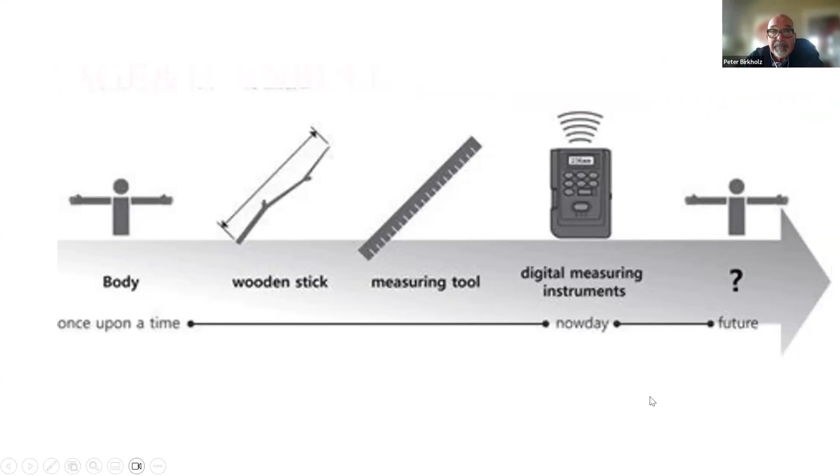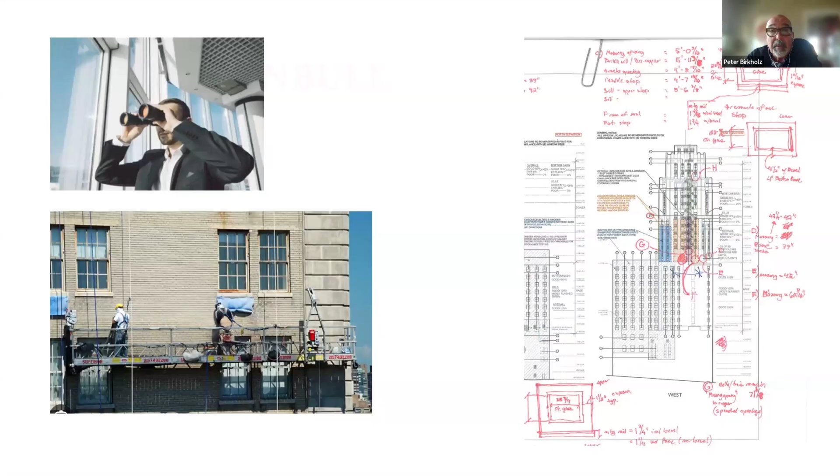Again, how do we do our work? We go out, when we're not doing the laser scan to BIM, we use binoculars, we get on swing stages, we measure things. We take old drawings, we mark those drawings up, like you see on the right. We take that back to the office, or we send it to a consultant, and then the typical process was manually putting that into CAD or Revit or something like that, and getting some sort of a line drawing that can be used for the documentation going forward. Incredibly laborious, and prone to inaccuracies.

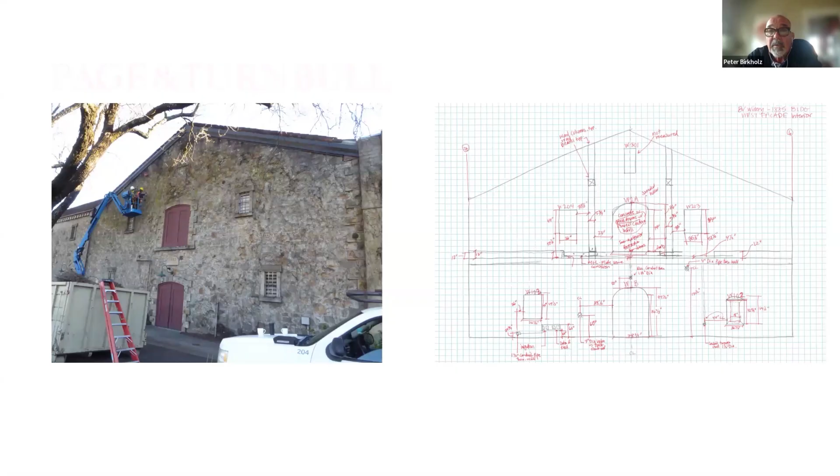More examples. This is a building up in Napa that we're working on currently, and this is a field drawing where somebody's gone out there and measured things and gone back into the office. So where we can, we do incorporate laser scanning in.

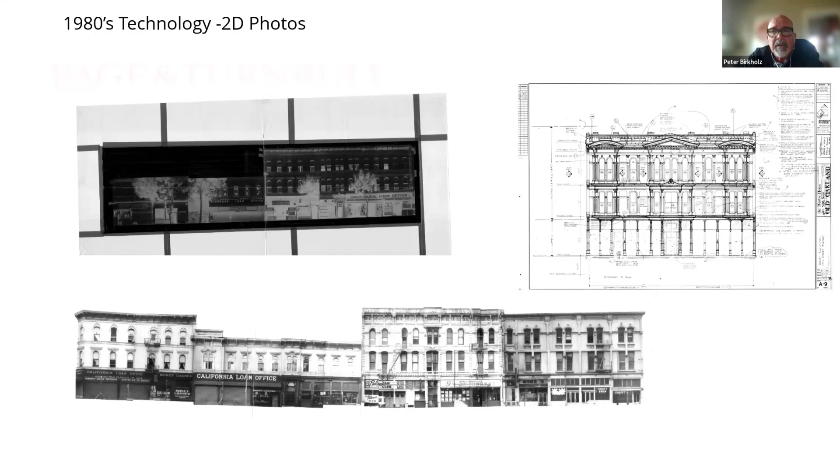Again, looking back to where we used to be, this is something I found in our archives where in the 80s, this is a building in the oldest buildings in Oakland, the commercial buildings, and the process then was to go out and take orthogonal photographs, take those negatives, tape them together, send them out to the blueprint place. They put them onto Mylar, and then that became the basis for drawings that you see on the right with lots of hand notes. So in a very short time from the 80s until now, where we've gone from hand drawing to CAD to now Revit, things have changed a lot.

I do want to mention that it's kind of ironic that one of the things in the heritage work that we do is the Historic American Building Survey. And the Historic American Building Survey has been around since the 1930s, recording prominent landmarks in the US. And they rely, and they still request, that these kind of line drawings, which are interpretations of the buildings, not incredibly accurate, but somewhat of a facsimile of the building, is the method of recording that. And so somebody is paid to do this sort of documentation, and then these drawings are printed archivally and they're put into repositories.

A lot of the work we do in California has to go through the environmental laws, and we call it CEQA, California Environmental Quality Act. And often buildings that are being demolished or altered, we have to record those as a mitigation for CEQA. And again, typically the status quo has been to just document these in paper drawings. We are now seeing things moving towards laser scanning and Matterport scanning, which I'll talk about, and putting those into some kind of archival form.

And there's also Historic American Building Survey photography as well. But the idea is that all goes into a repository that's sort of archived forever. But we are seeing a little bit of change where these sort of newer technologies are able to be used. And I would say that the drawback on the newer technologies, though, is you have a large digital model, and how does the public access it? And how in the future is the format of that digital model going to be a program that people have available to them?

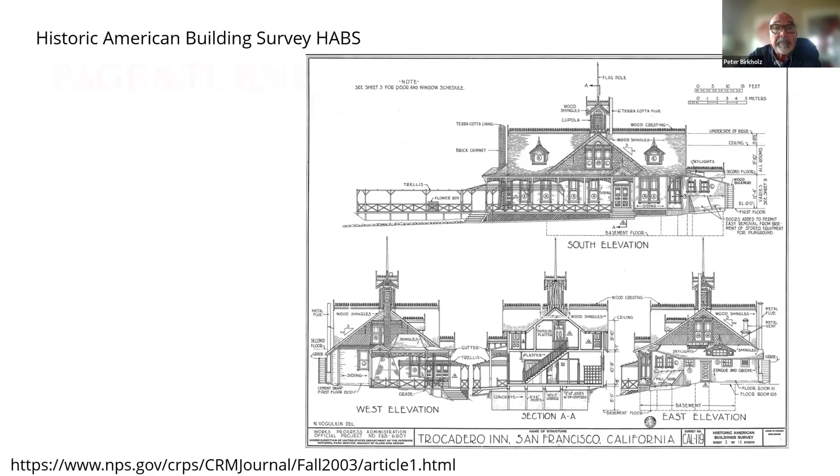Yeah. And the reason we had Ryan scan this was that we wanted to be able to push technology in producing models and facsimiles of this. And we were able to take that scan, Ryan, and I quite frankly can't remember the process of taking that scan and converting it to a file that ultimately got us to that STL file where we could print a small model of that. And I'll show you, I have one sitting here to the side, but I'm not going to go grab it.

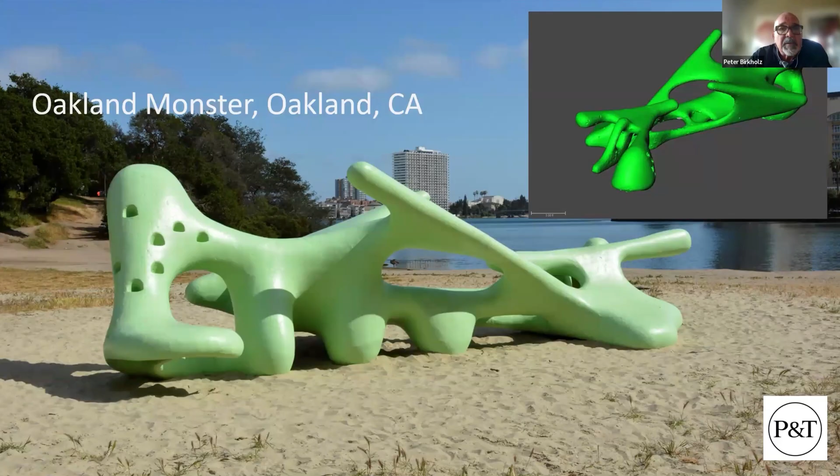The larger scale of projects that we're doing: Page and Turnbull is on the team for the California State Capitol Annex, a $500 million project in Sacramento. This project started about 4 years ago, and we've relied heavily on laser scan to BIM. I'm sorry, Ryan, but Trimble got this one.

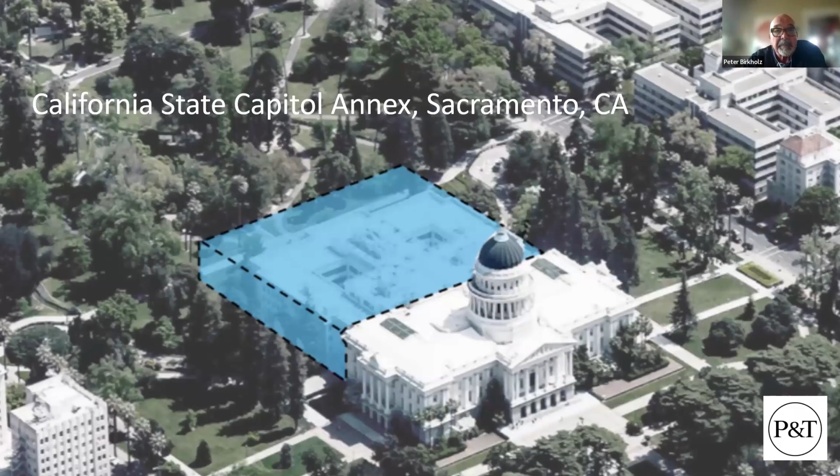I mentioned a Matterport scan. A Matterport scan is often another deliverable. The beauty of a Matterport scan, say on the Desert View Watchtower, is that point clouds are hard to manipulate and look at, but the Matterport scan gives a readily available virtual room-by-room twin that we can walk through and look at existing conditions.

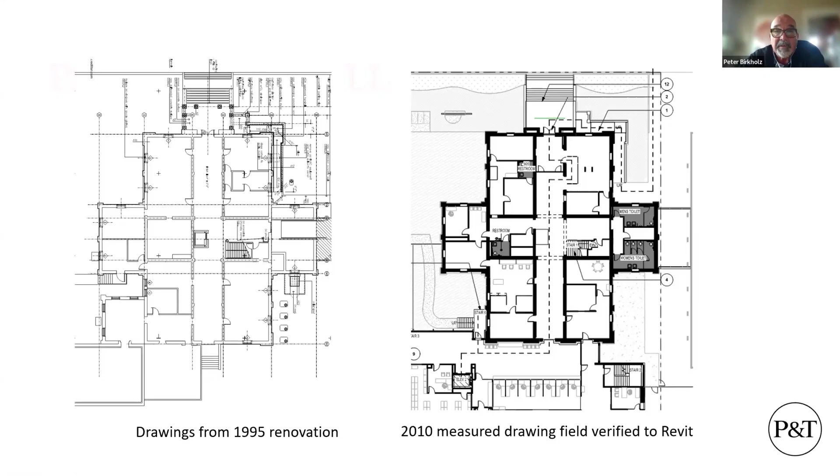So you miss things when you're going out and measuring, where yes, you've got a door, but where exactly is that door on the plan? It became a CA, a construction administration problem, coordinating how big that door is and where that door is. But since 2010, we have been exclusively going to the scan to BIM process.

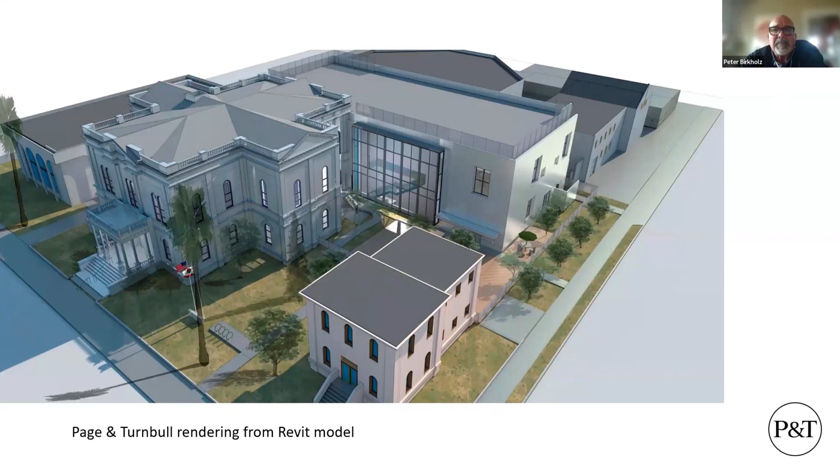One of the other beauties of scan to BIM is you get a lot of detail. This is a rendering that we produced in-house from our Revit model, and you can see it's a little flat, not a lot of detail. You get a much more detailed product when you go scan to BIM.

Another project we did, and this was an interesting one in that, did you do this one too, Ryan? Yeah. Yeah, I sure did. This was a little bit of a rabbit warren, lots of levels, yeah. And deceptive. So a 1920s, two hotels next to each other. And the issue with these two hotels next to each other, you see on the left this bigger block, and then on the right, you see this smaller block.

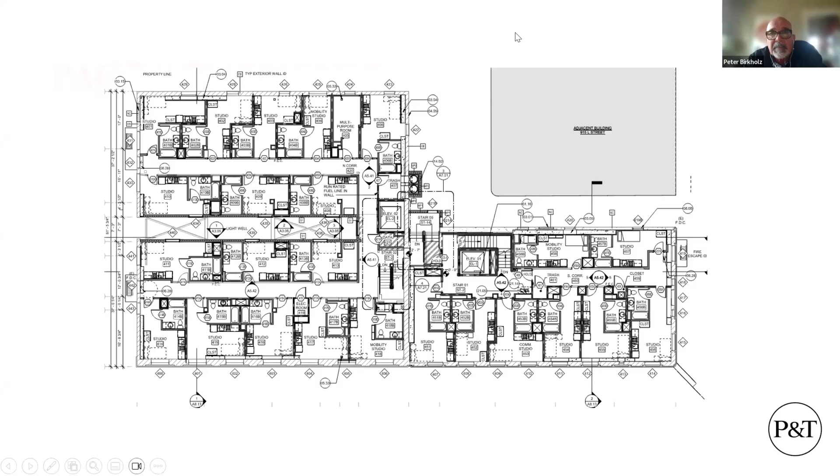And in the section here, you can see I put a section line across here through the center, but the floors don't line up. Each one is about 18 inches. The floor to floor height's 18 inches different. And the issue became, I believe, Ryan, that we didn't scan it as one model. We scanned it as two or vice versa.

And so when we went to do our Revit model and we were putting the floor plane in, in some cases it would have part of the sixth floor and part of the fifth floor on the right, or vice versa. And to even complicate things further, we were working with a drafting firm in India that was helping us with the drafting because it was in COVID and we were incredibly understaffed.

They started masking floor areas to sort of make the plan work so that everything was on the fifth floor that should be on the fifth floor. We didn't know it, and it just became major confusion. In the future, always scan these things as one model, I think was the lesson learned.

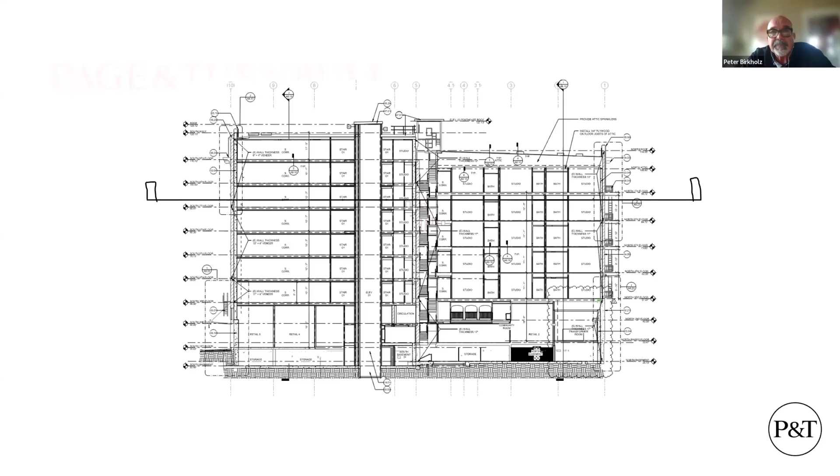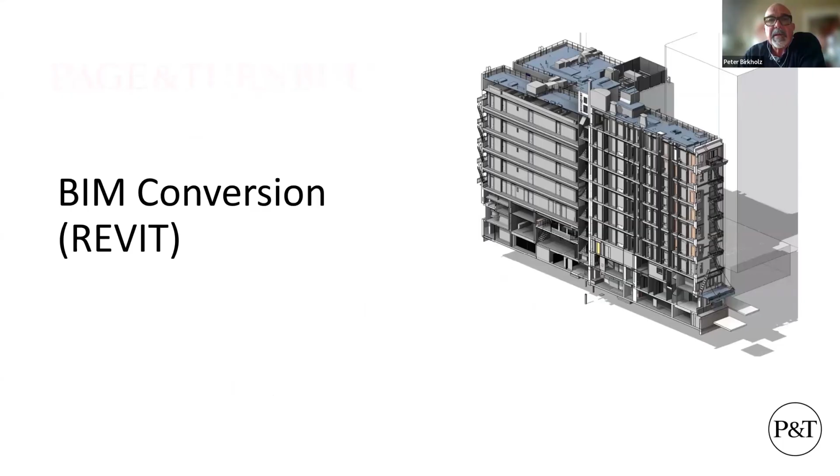Ryan, I'm going to let you talk about photogrammetry and laser scans perhaps in more detail. And unfortunately, Ryan, due to the timing, I couldn't get a lot of pictures into your slides, but I'm hoping you can fill in words. We're going to talk about BIM conversion to Revit. I'm actually really curious, Ryan, how the heck does that happen? Is it automated or is somebody really tying all those points together? We'll talk about how much detail.

I think the benefits are you get accurate dimensions on your computer, you've got the virtual twin on your computer. You don't have to go back to the site. Like if we're going up to the Grand Canyon or something from San Francisco, we've got that picture and the point cloud, so we know what it is. We don't have to go back for additional visits unless something happens to the technology and we have to redo it. It allows for QA such as clash detection, and you get a lot of precise details.

And I think one of the interesting things on historic buildings is that it's important that it captures out of level and out of plane. For instance, buildings over time have settled, and we've got a tenant coming in that wants level floors, but we don't even know they have unlevel floors when we're doing it with the tape because it's very subtle. The laser scan will capture all that.

And if we're doing a new addition and the walls of the building are slightly out of plane and we've got a new curtain wall going, we can accommodate that out of plane differential with some sort of a joint that is, say, bigger at the bottom and smaller at the top.

Lessons learned: you want to do it early, you want to scan everything, scan behind. And I think another issue we had, Ryan, on that St. Clair or the Capitol Park Hotel was, that was a single room occupancy, which, for those of you who don't know, is a hotel for transient people and the lowest cost housing that's available. In COVID, there was a huge demand.

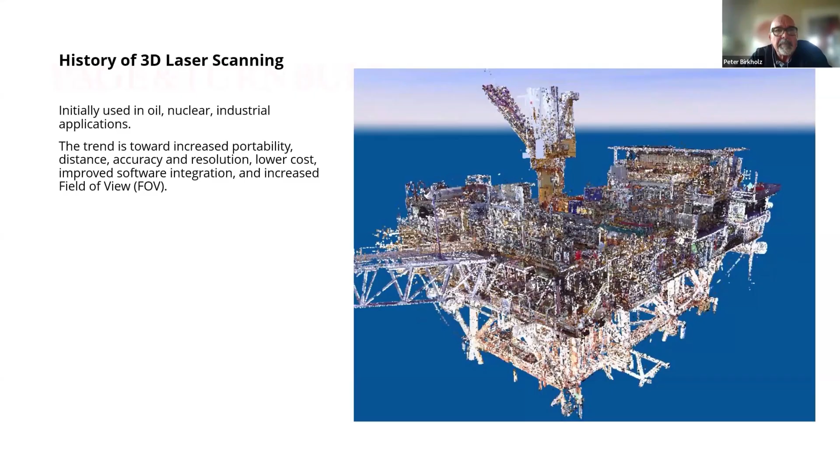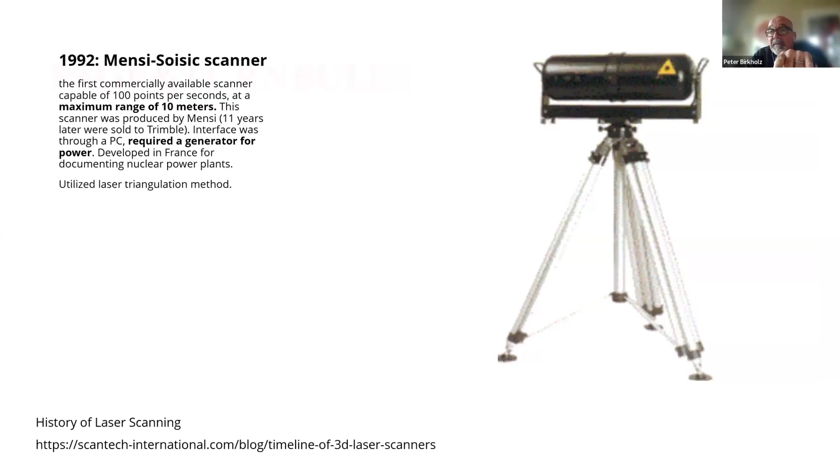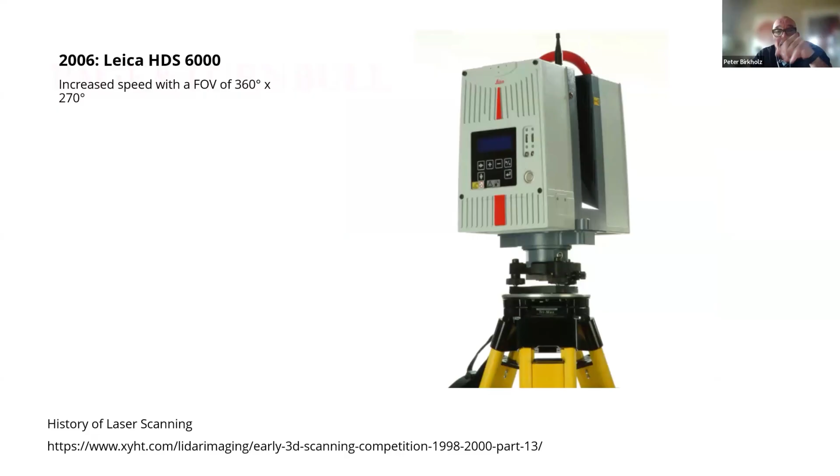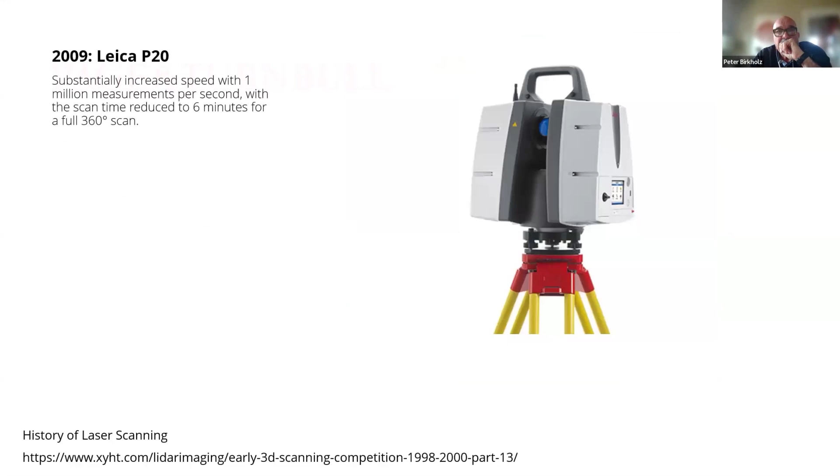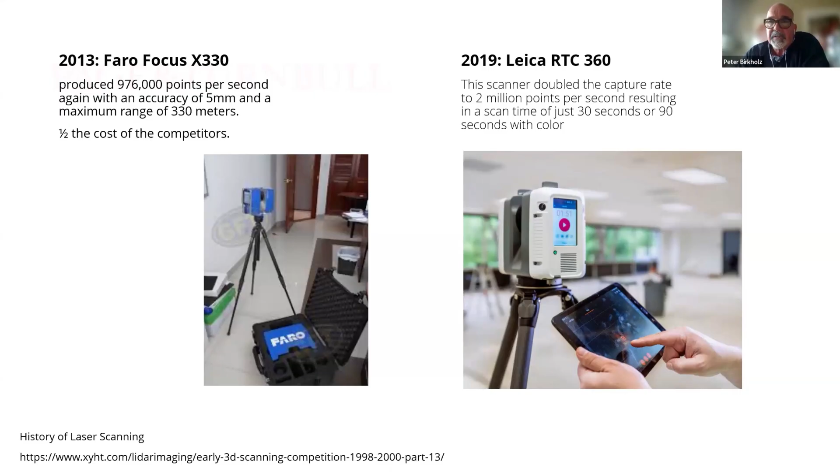And I'm not going to get into this, but Ryan, I would like to hear from you when we get into this. What was your first device and how much it cost? Because I think the early devices were hundreds of thousands of dollars, and now they're significantly less than that. And all this happened in 20 years. I think it's just amazing what's happened in 20 years. And now, Ryan, I'm going to let you sort of talk about where you've come from and what you've been doing.

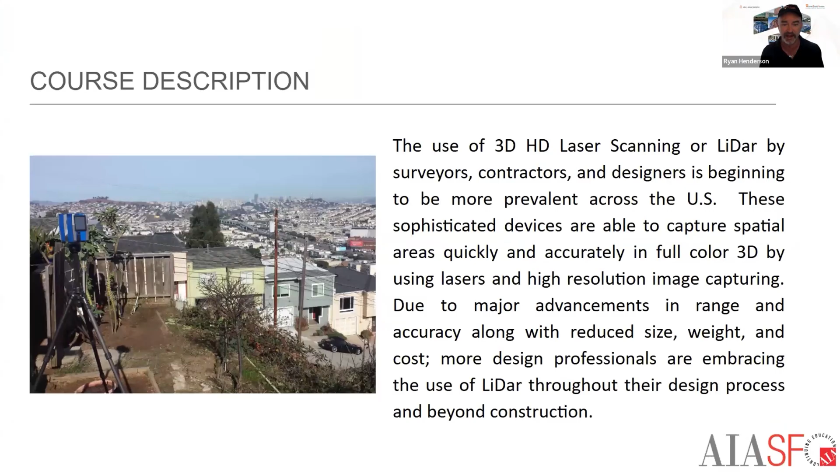Sure. All right. Thank you so much. If it's possible, I can share some slides. I can just kind of blast through a couple of things from a presentation that I've got pulled up, if that's okay. I will stop sharing. How's that? I can see it. Okay, beautiful. This is a presentation that we give that's usually about an hour long, so if it's okay, I'm gonna whip through this pretty quick. Peter's covered a whole lot of things already, and I'll just pick up. I'm gonna talk over these slides, and people can read just so they're on the recording.

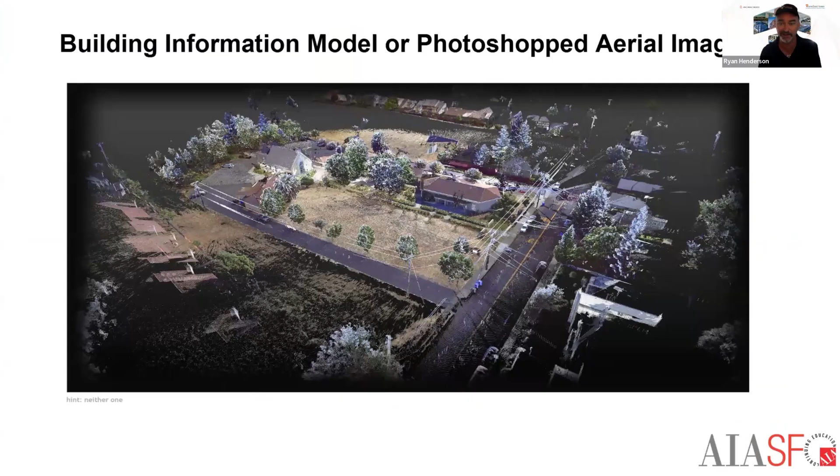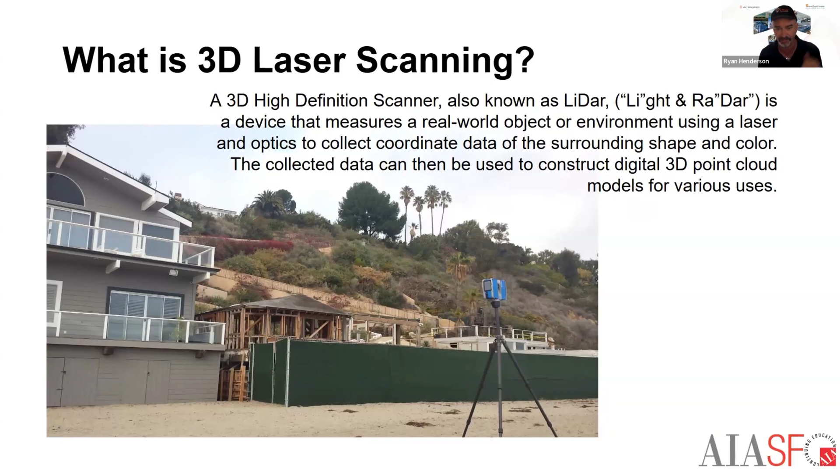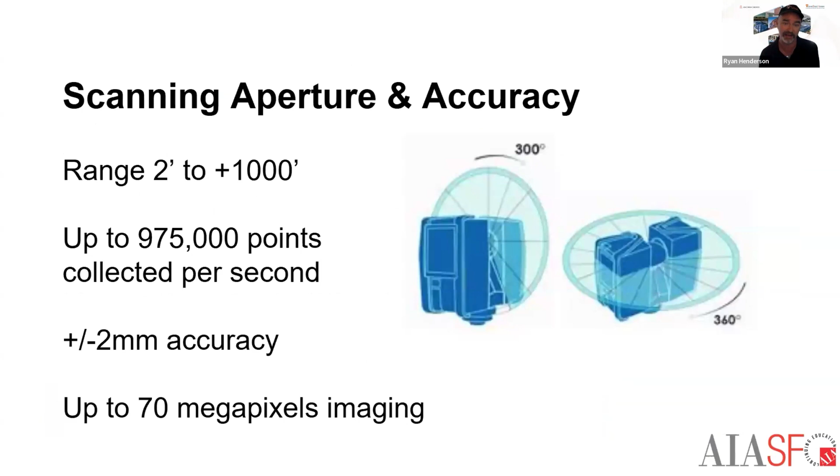So Peter, very detailed. Thanks for that. Kind of brought me back to the early days. We did actually start with a Faro 330. You can actually see it right here. And what was the price of that, Ryan? Out the door, the figure we all throw around is basically 100 grand. Yeah. I was lucky enough that I had a bit of a real estate investment windfall, and I knew this is where everything was going. And I had just decided to launch out on my own, and I needed to set us apart from other firms. And this did it.

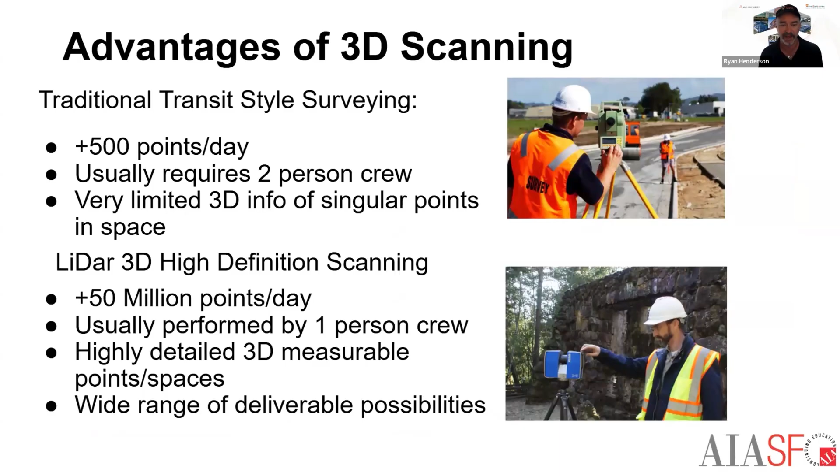Unfortunately, in some ways, it did it in terms of providing scan to BIM services, which trumps our architecture services by a fair clip, which is totally fine. However we can provide service to move forward design and building technology, I'm all for it. We had actually worked with SCI-Arc in the early days, doing some historic recordation here in Sonoma County, where we're based. Here's a great slide of sort of what we used to work with versus what we work with now.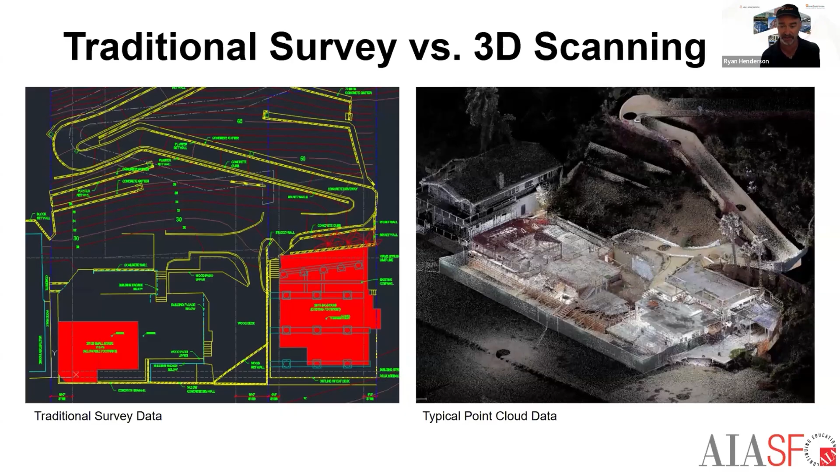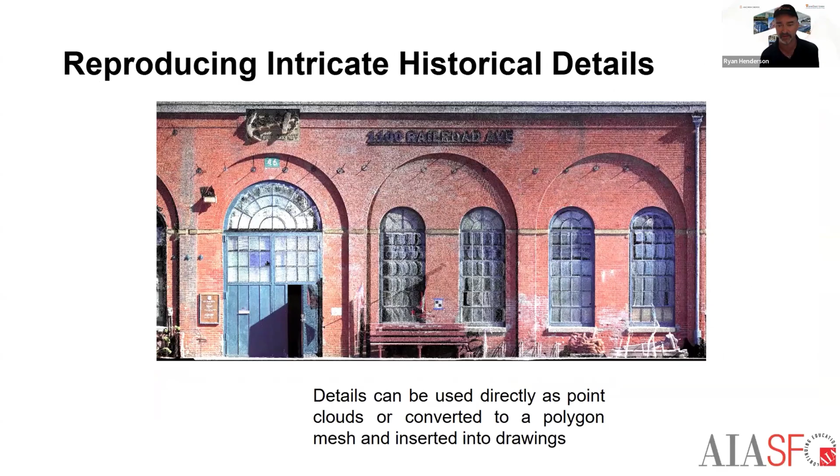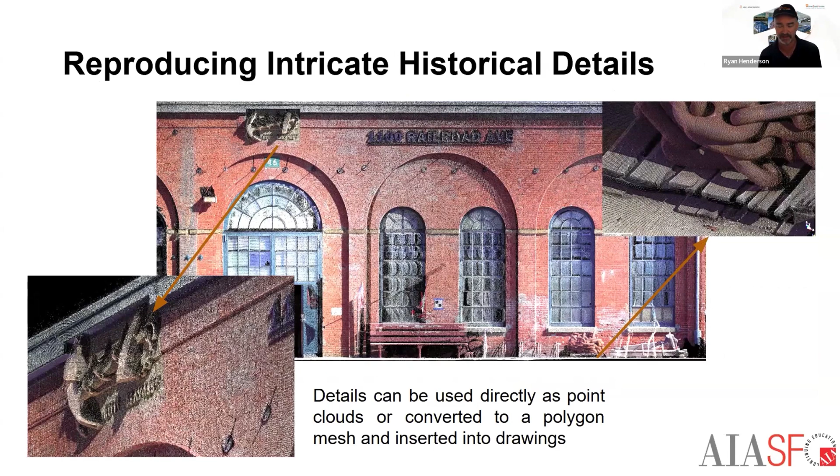So this was a project in Malibu on the beach, and on the left is sort of standard, very low information civil survey, and then on the right was our laser scan, which has literally every stud, every screw. Sometimes that can be too much, and so one of the skills for scan to BIM providers is to just get down to the details that actually matter to the project. The scanner doesn't care if you're capturing an ornamental detail on a building or the gaps in the wood on a pallet rack. It does not care. It will measure it if it can see it.

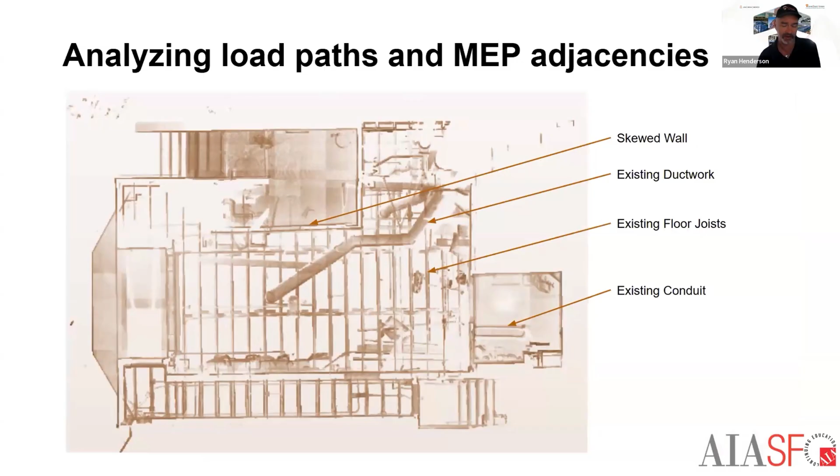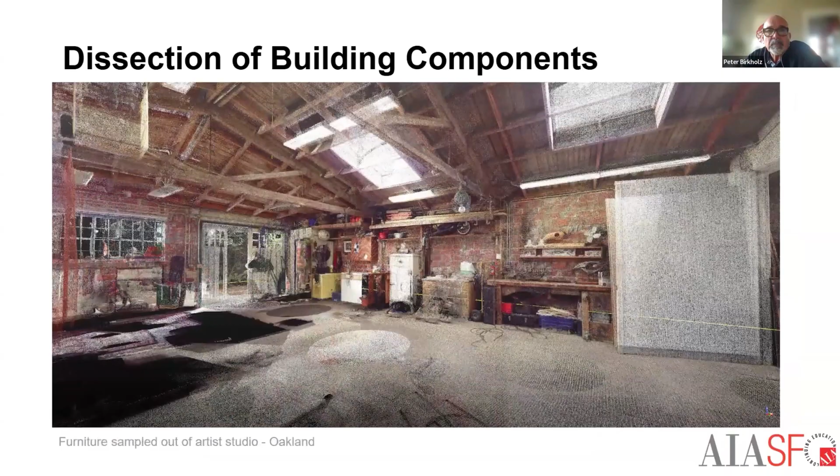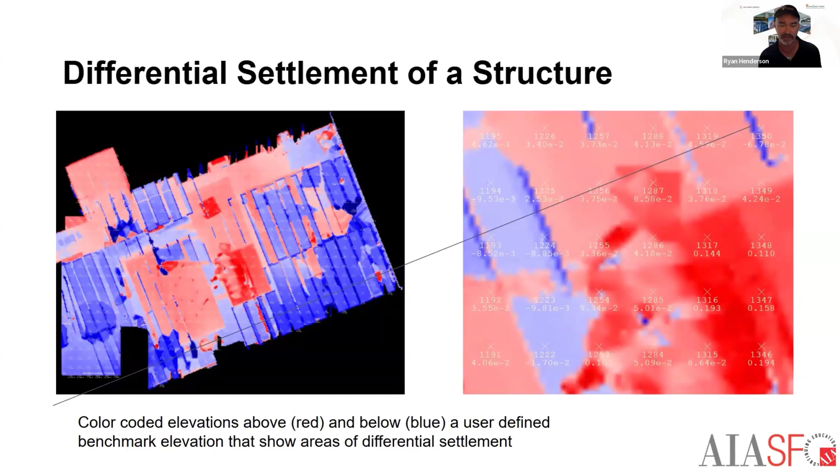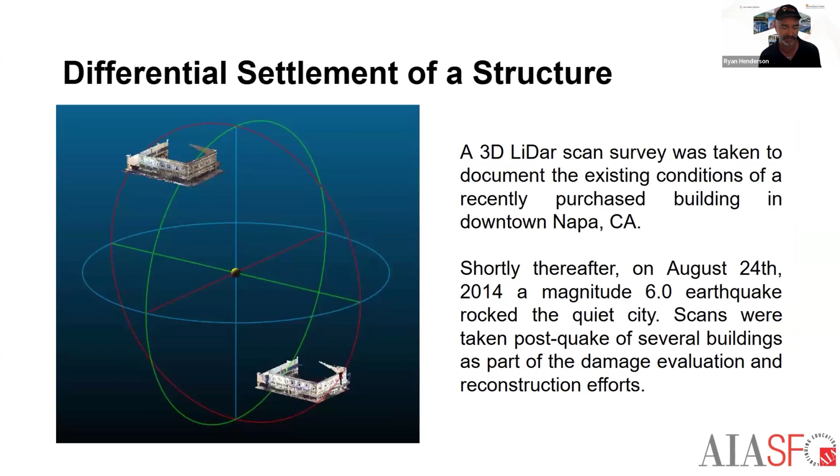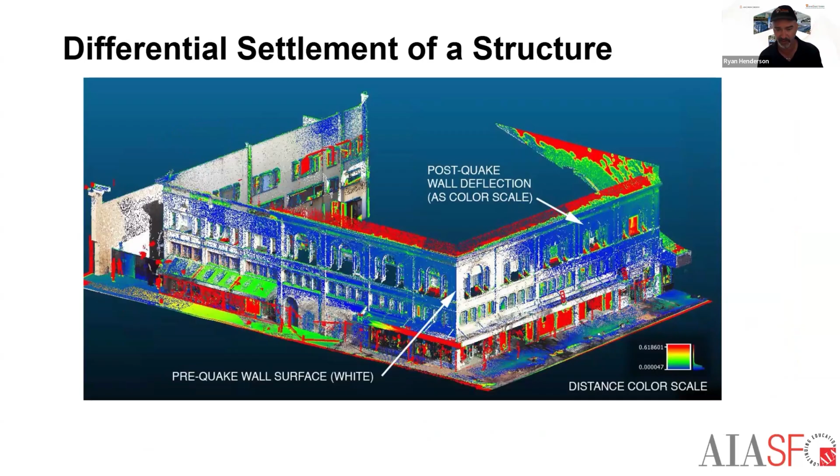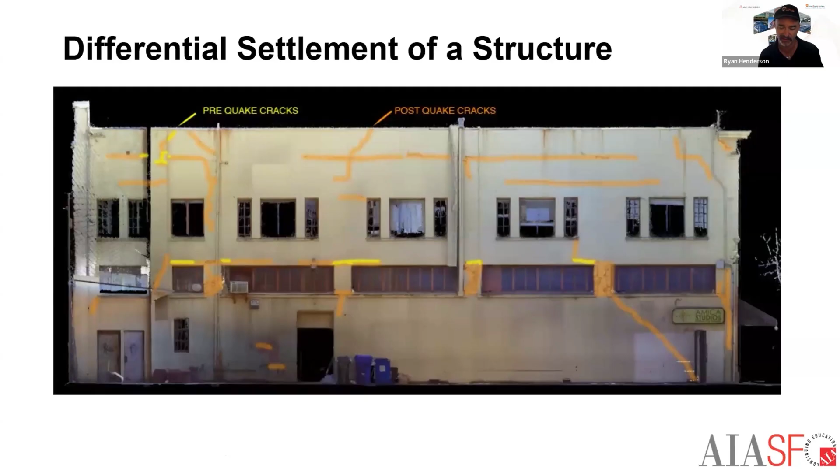This was an example of some floor flatness scenarios that Peter was talking about earlier. We've encountered those for medical office buildings where everything needs to be very flat. Older buildings in San Francisco have lots of differential variations in floors due to the technology not being the best in terms of forming and pouring and helicoptering slabs and things like that. So this is a quick example of pre and post earthquake, where we analyzed the building and it actually torsioned about a whole inch. And we could also identify individual cracks before and after using orthogonal photogrammetry from the laser scans.

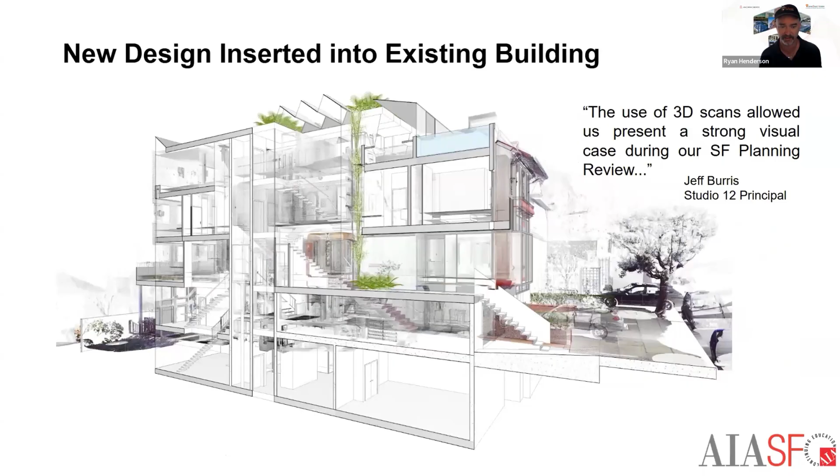One nice thing is being able to overlay new designs onto old designs. This was a project where the neighbor was complaining to the planning department saying that they're making the building bigger, it's going to block her views, and they showed those images and said no, it's actually still within the same envelope.

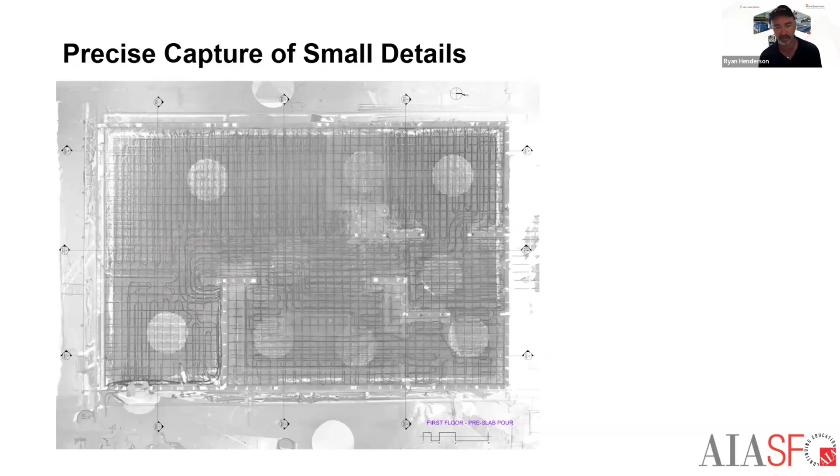This was some of the things that laser scanning people think they can do is like X-ray, like see through things, when that's actually not the case. However, if you scan at certain points of time during a project, you actually can effectively see through buildings. In this case, this is a pre-slab pour of underground or in-slab heating elements. And so we wanted to make sure that we knew exactly where all of these tubes were and also where the rebar was. So when they were doing embeds or posts or handrails into the slab, they would not hit pipes that were in there.

Blast through some of these. This was an example of some above ceiling scanning. Peter mentioned that as well. When possible, it's a good idea.

Ryan, you got plenty of time, so okay, good.

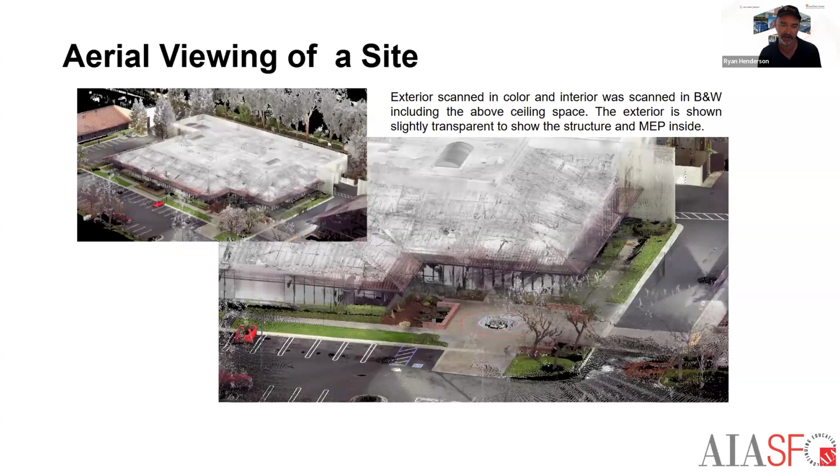It's a good thing to do. Unfortunately, it is somewhat cost prohibitive because it's a ladder operation. It's having somebody remove ceiling tiles and put them back in some cases. Ideally, what we found does work is if we scan below ceiling, maybe take a couple of scans above ceiling just to get the structure above confirmed. And then if it's possible to do a design build package for MEP after a demo phase has happened, that we found works pretty well, and it keeps our costs down, because above ceiling scanning basically doubles everything for sure.

There's a couple of different products that we use, and this is from Faro and provides remote viewing, sort of a la Google Street View, but of your project the day it was scanned, and you can scan everywhere our scanner is set and take dimensions remotely, which has been, I know, a big help for us and other firms where it cuts down on the number of site visits, the number of interruptions made. And for us on the modeling side and on the design side, having the project up on one screen where you can move around and take measurements from it and notations and screenshots is highly valuable.

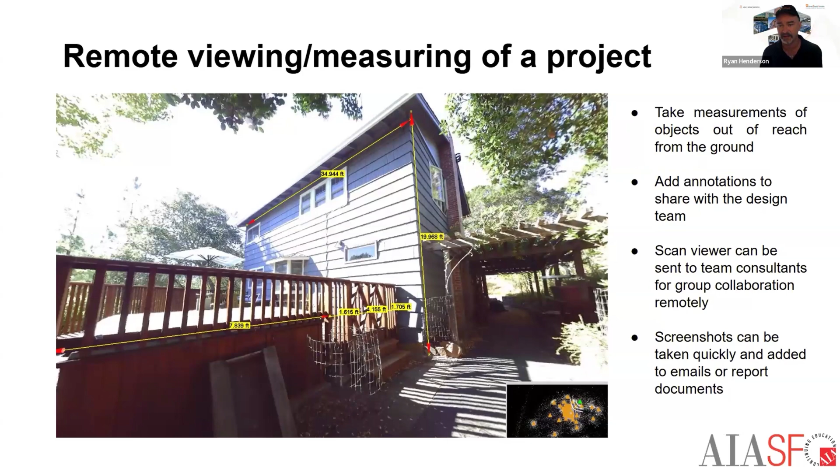And is that a point cloud, Ryan, that you're measuring? It's technically not. It's the panorama image is what you're looking at, but basically the point cloud data is stacked behind it. And so you can take measurements of the point cloud, but you're not actually dealing with the visual weight or the navigational weight of that point cloud like you are in Recap, which is an Autodesk product that integrates with Revit. That can be a little cumbersome. And so this is a Trimble product, which is a little more lightweight.

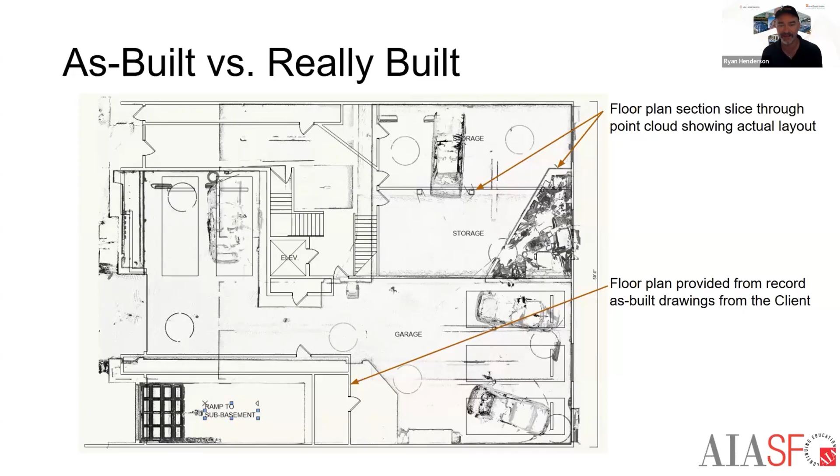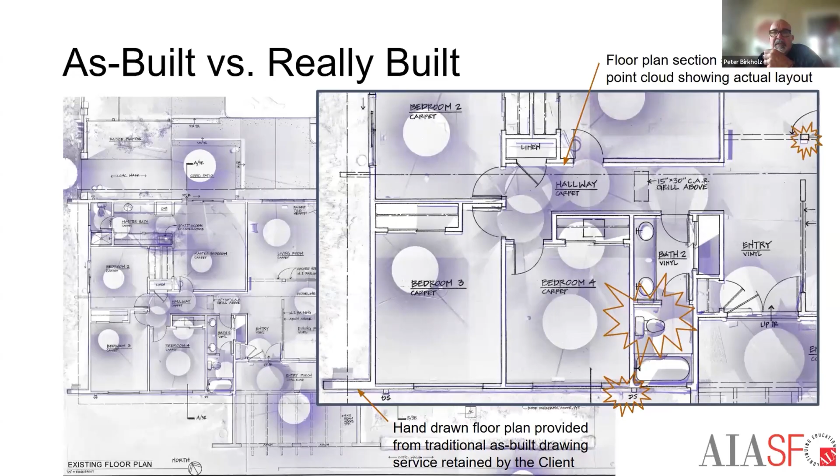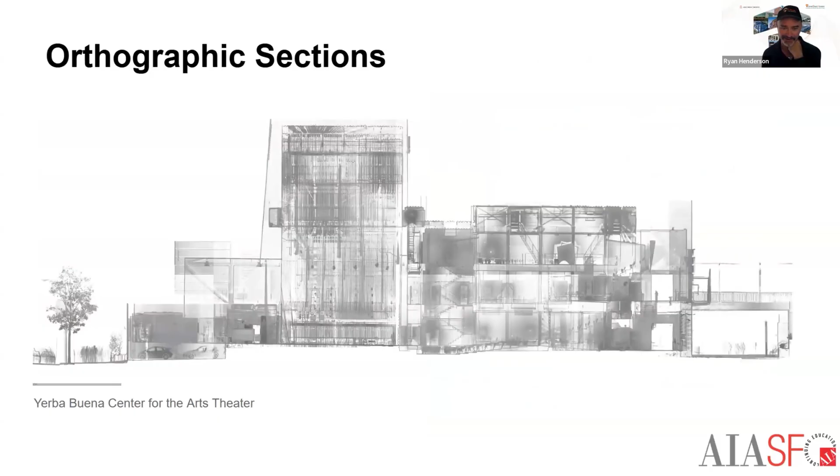Yeah, and in that particular instance, what we perceive is we think we do have an accurate thing, and we look at that CAD drawing and we go out there and it's like, yeah, it's captured it, but the reality is it doesn't. That is true. And it's hard to field measure a building like this and get every angle of every seismic brace and every rope pulley for a full proscenium, fly and stage and all those things. Here's a brief example.

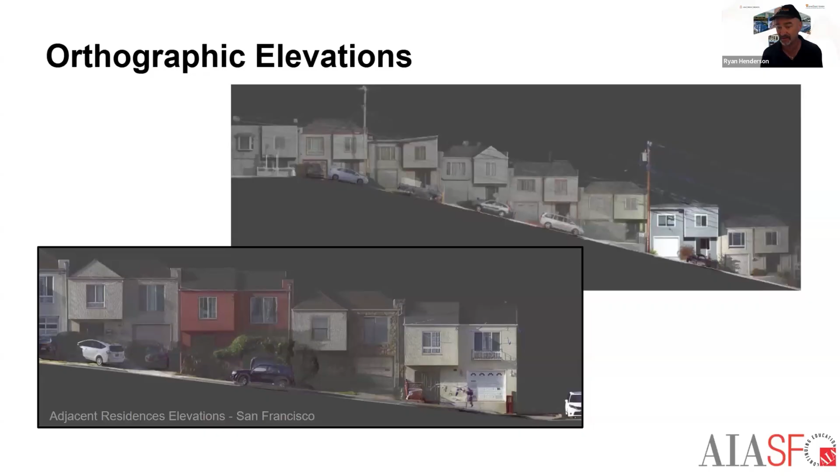And a client would just lose their mind. It's like, well, I'm not paying for that. And so we actually were able to just pull it from the scan data that we were doing from the project anyways, and presented it in this format, which was acceptable.

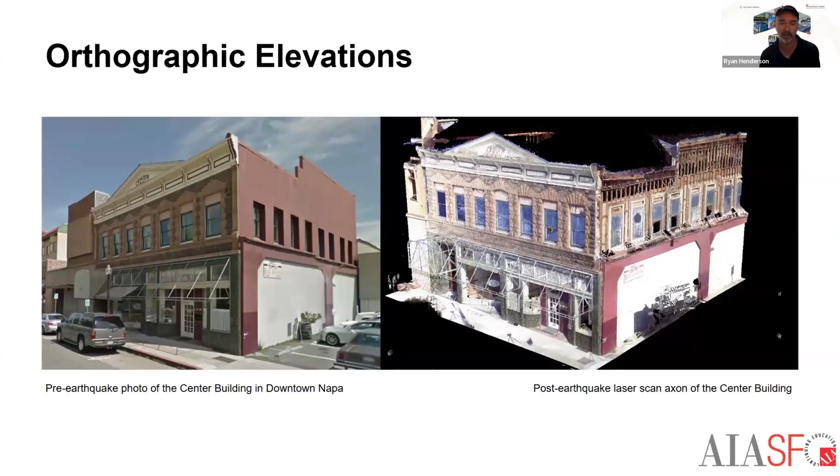Hopefully more reviewing agencies will start embracing point clouds as a deliverable, or at least the images from them as deliverables, because sometimes they're only used to vector drawings. They're only used for that, which is great. But I think the one on the left and the one on the right combined provides the most amount of information on a building, for sure.

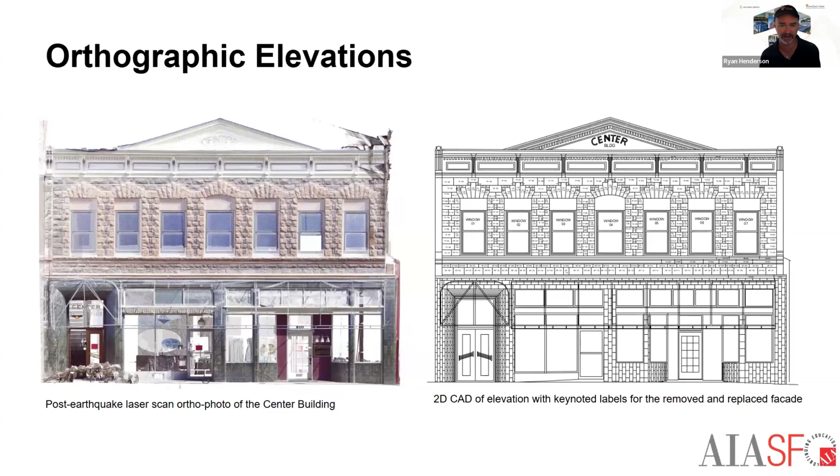So this was a case where it was post-earthquake and they had to remove every stone of the building and put it back in its original location. And so we scanned it and numbered it and turned it around in, I think, just like 48 hours. Very quick timeline. Wow.

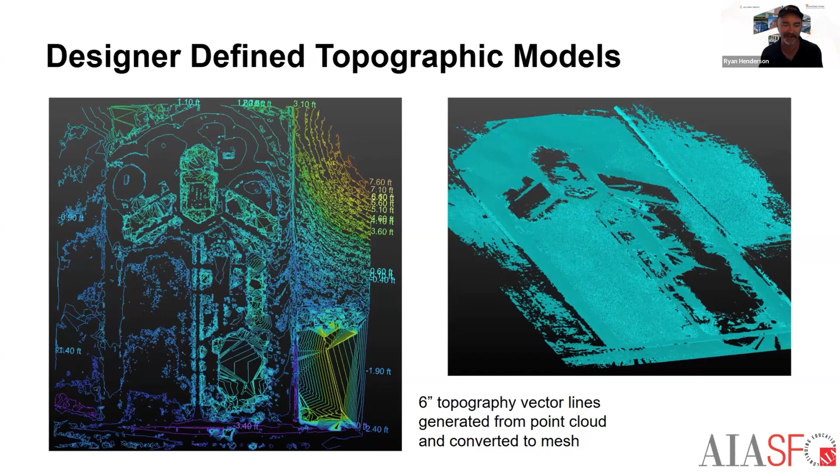But on the left, you'll see all these little tiny dots in some of the larger areas. And that is not the ground. Those are weeds, because they hadn't mowed the lawn, and they came through in the topography. So sometimes you have to really scrub your data to get good data. When we're working, we see this first before we can go in and clean everything out and give the end user what they need.

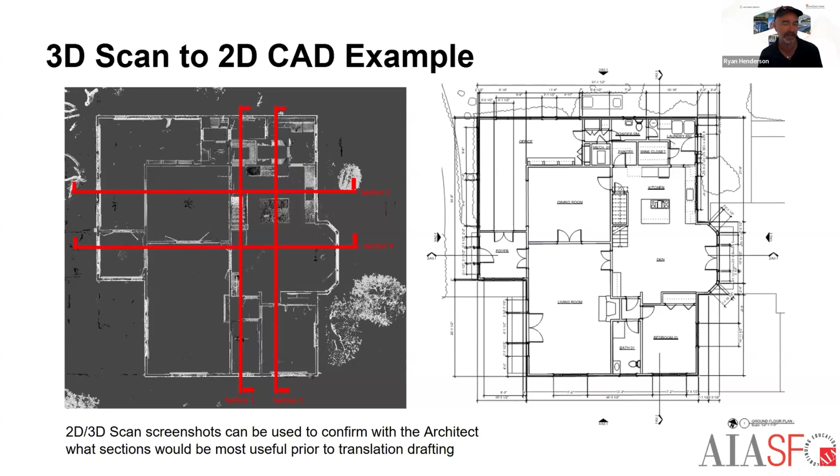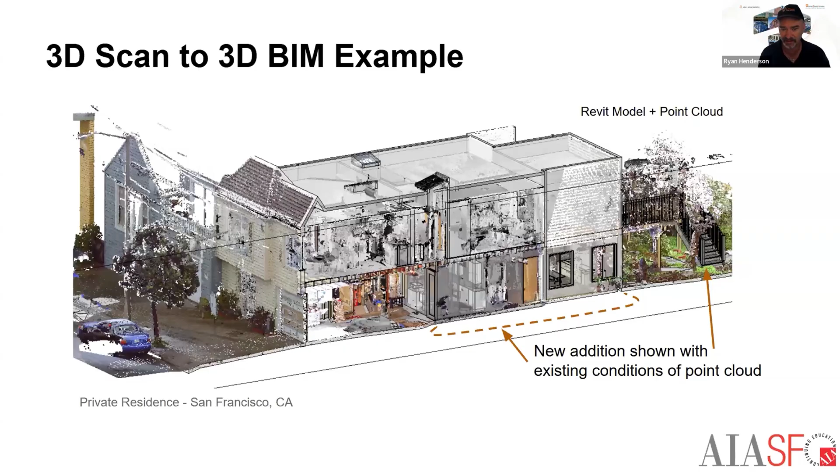We design 3-dimensional buildings, and yes, it can be done in 2-dimensional representations, but those can cause some issues. And so 95% of our clientele is Revit based, and we utilize Scan to BIM stuff all the time, obviously.

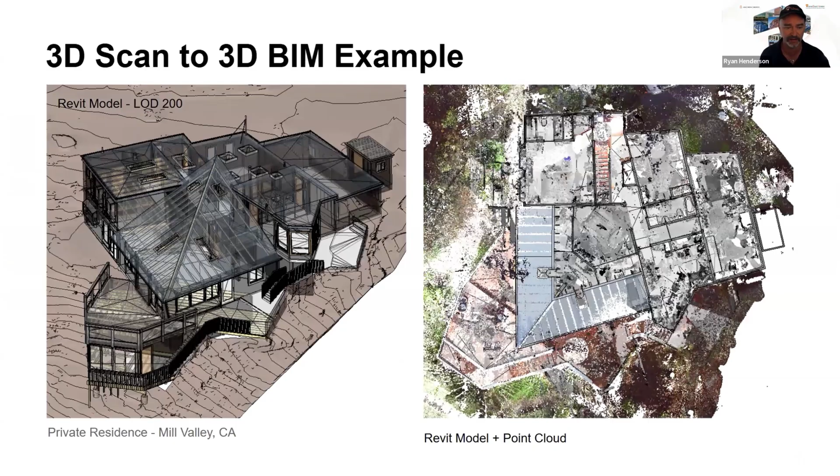Here's an example of some residences that are again quite difficult to capture in a 2D format, but we were able to get down to all the framing members and all that stuff.

I can talk about it now, thank God. We've worked with some pretty high-tech companies over the past decade and a half or so. One of which is NVIDIA, and we've worked with them on a handful of fairly large projects. And that was our first foray into mixed reality, porting point clouds to VR headsets, so you can do fly-throughs from 3D scans and things like that. That is somewhat where I think things are headed, but we'll see. VR is kind of already getting surpassed, if you will.

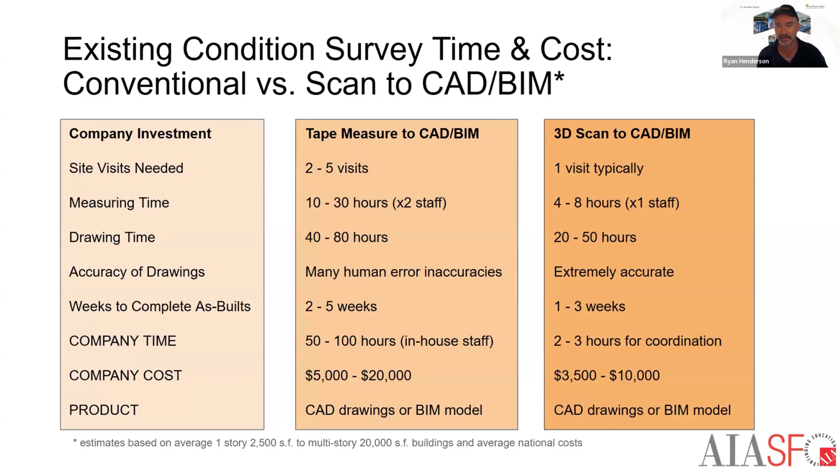This is just to give people a rough idea of what some of the costs are. Every project's different. We can capture a 3-story walk-up apartment in the same amount of time that it could take to do a whole auditorium, just because laser scanning is line of sight. If you think about it like a firework exploding, if you have a big area, you're going to cover a lot of it in one scan or a handful of scans. Whereas if you have a bunch of tiny little areas, you're using little tiny fireworks, and you've got to use a lot of them to cover all those areas.

So I'm going to spend a little bit of time on this. I know it's text heavy, but we'll hit some highlights. Peter's fantastic, and I love working with Page and Turnbull, and Peter's known for his highly detailed queries for projects for us. Sometimes I'll get an address, and sometimes I'll get a picture. But a lot of times it's, hey, can you go out and scan this for us? I'm joking. Sometimes it's more than that, but a lot of times it's not. It really is just, here's the address, can you go give us a model?

And so that usually kicks off about a 5 or 10-minute phone conversation, and that's usually all we need. We want to make sure that we understand the goal of the overall project. Just because we can scan and provide very high detailed models doesn't mean that we need to.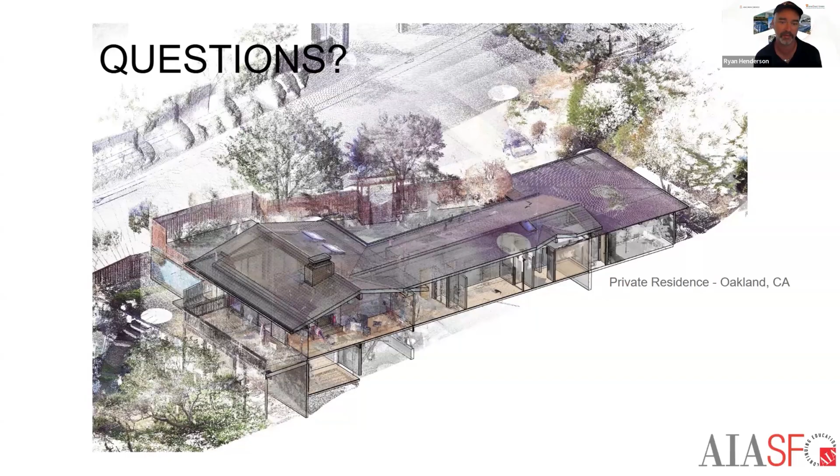Also, one of the things that's missing is the architect or engineer's mind frame of how the building is built in Revit. Does the wall sit on the floor, right? Does the floor slab go into the wall or not? Is there an indication of a footing or not? So all of those types of decisions that the scan to BIM provider has to make in order to provide a model impact the design team for sure.

Yeah, good. Do you see it? Yes, I see it.

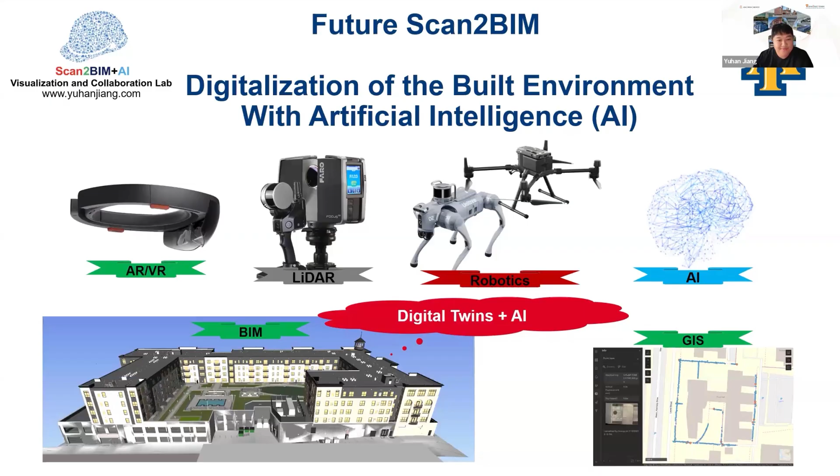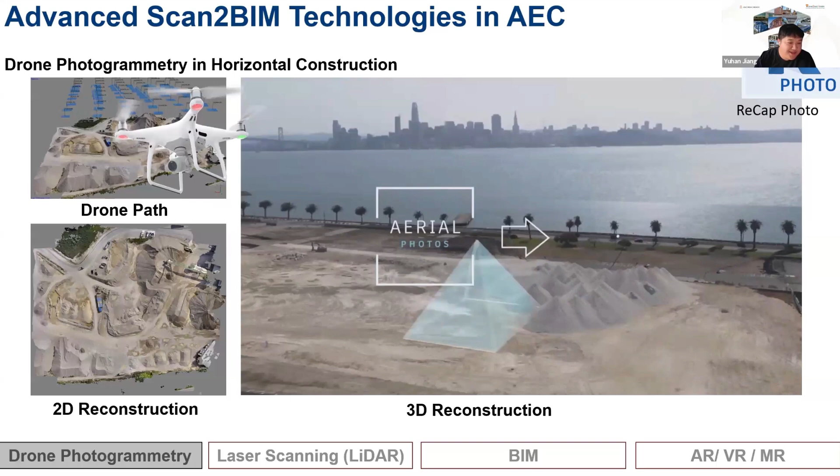Something different from the laser scanner is photogrammetry. Photogrammetry is very powerful. Before I started using LiDAR, I spent a lot of time dealing with photogrammetry. Photogrammetry means you use the drone to scan the sites or buildings and process the data; basically it's image processing and 3D reconstruction based on the images. Then you get very accurate and very colorful models. For example, we can see the 3D model in the left corner, and the 2D images over here as well. With those, we can do the same thing as the LiDAR scanner results. We can do measurement. Next slide.

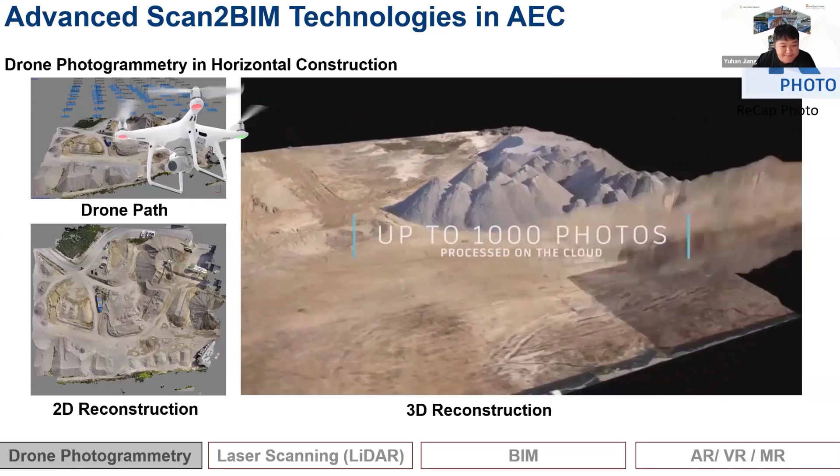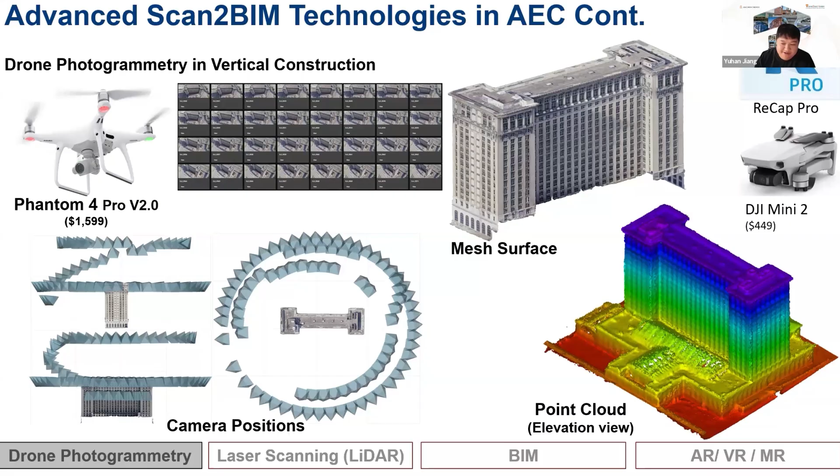Here is an example for vertical construction. We call buildings vertical construction. We can fly the drone. The price for the drone is not expensive, and we can use cheaper, affordable drones like DJI Minis. DJI Mini has been updated to the Mini 4 Pro, but the cost is still close to this. To scan buildings, you fly the drone around the buildings from the bottom to the top, and you want to scan the roof. The angles will be facing the buildings, or you change to 45 degrees facing the buildings. As you can see from those images and the shooting station positions, you get a point cloud, similar to the laser scanner or LiDAR results as 3D points. Next slide.

Here are some examples. We talked a lot about the terrestrial LiDAR scanner over here, and also drone-carried LiDAR scanners. And if you have a mobile phone like the iPhone Pro or iPad Pro, you also have a LiDAR scanner available. You can download apps like the 3D Scanner App, which is totally free, and generate your point cloud results from your mobile phone directly. There's also an app called Pix4D Catch that uses your mobile phone to capture images and then do the photogrammetry process. You still get 3D point cloud results like this one here.

Comparing the two, the advantage of the laser scanner is it can quickly get the point clouds and cover as much as you can, because when you capture, you can see which part you have captured. But photogrammetry depends on the quality of the images. When you finish scanning, you may not be sure whether there are enough feature points to make it dense enough. If you have a missing part, you will see a big hole, like the grassland over here, but you can add new images and reprocess, which will give you more detailed results. So to my eye, with the LiDAR scanner, you scan the scene and you get it, but with photogrammetry, even if you take the picture, you may not get it, so you need to repeat the process to get good quality. Next slide. Yeah, next one.

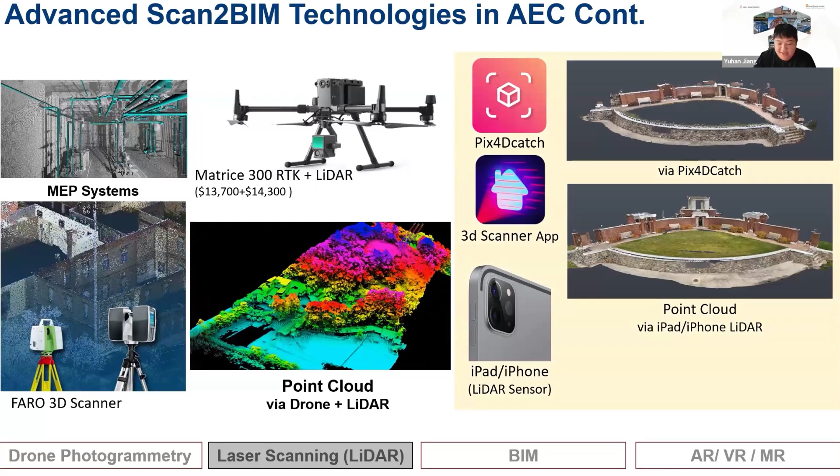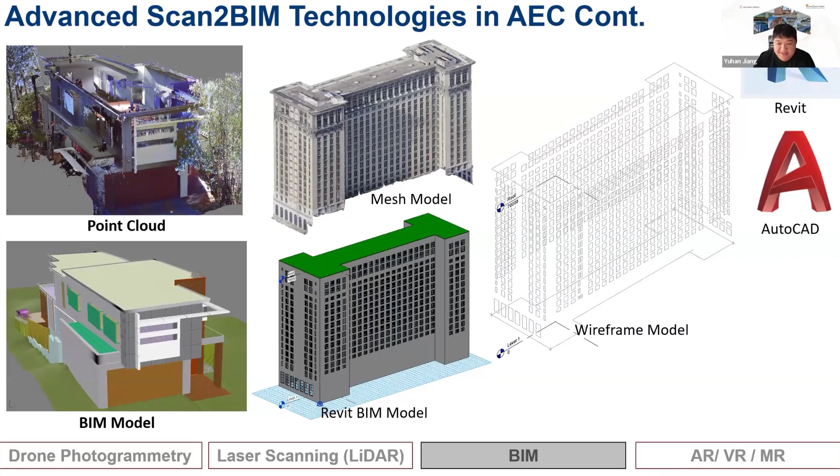So once we get all those data, we will think about the Scan2BIM process, right? To the BIM process. Once we scan, we get points, and then we will think about how to convert those point clouds into BIM models, or even with photogrammetry, how we can convert those mesh models, still in 3D, not like point clouds, into a Revit model, or even 3D wireframe models. Next slide.

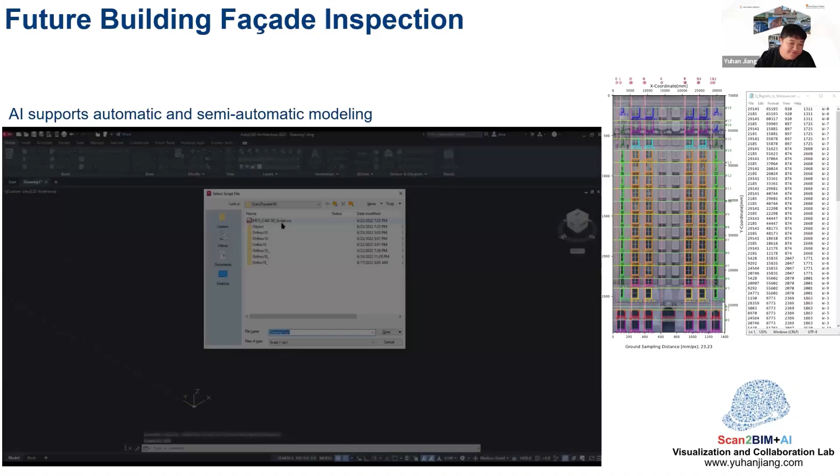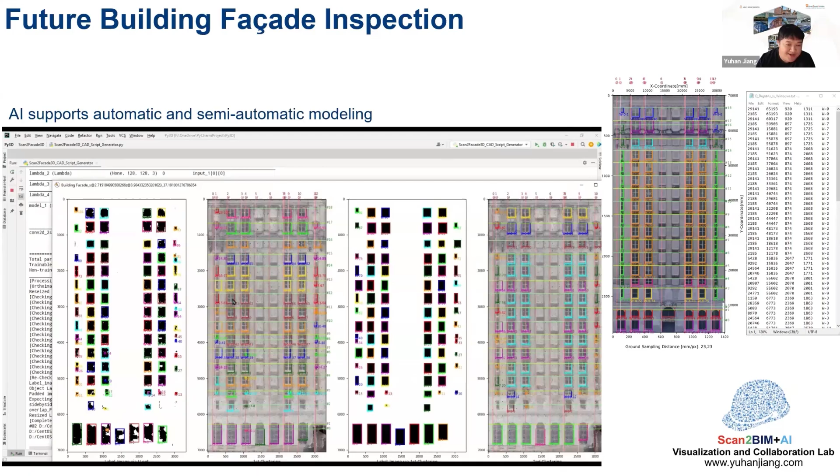So in this video, since we are doing historic building documentation, we were trying to facilitate the process of using either the photogrammetry results or the LiDAR scanner results, powered by AI, to generate the model automatically. So at the beginning of the video, you see a 3D mesh model. And here, you see how the algorithm is tracking all those floor plans. And this one shows how the AI is able to find all those windows.

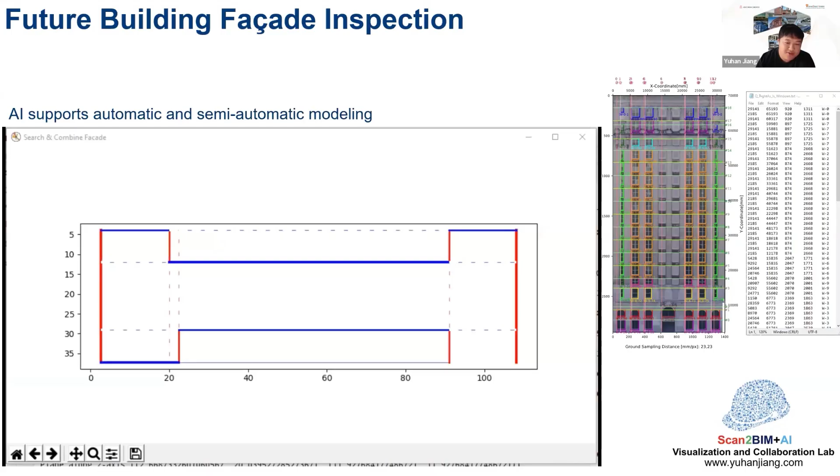And then this one shows how AutoCAD uses the data found, like the window schedules, to set up the scripts to create the 3D wireframe models. And definitely we can do this in Revit as well. So in the next slide, we will show a video about how to do this in Revit. Next slide. So here, it's the same process. So Peter, can you click to close the floor plan?

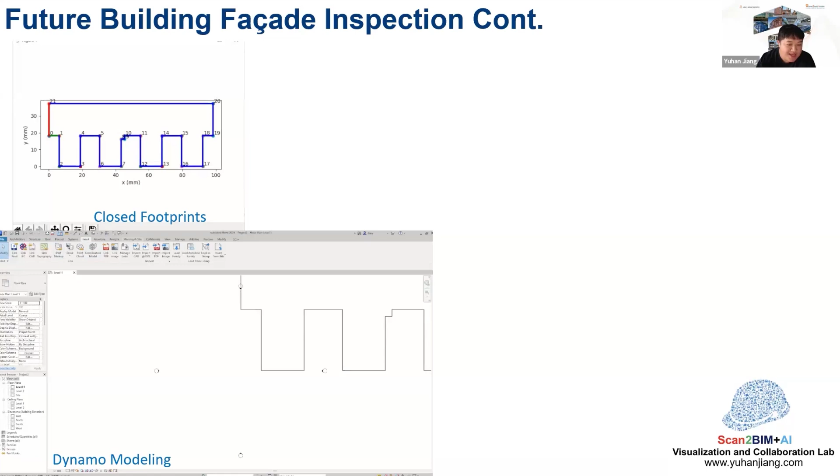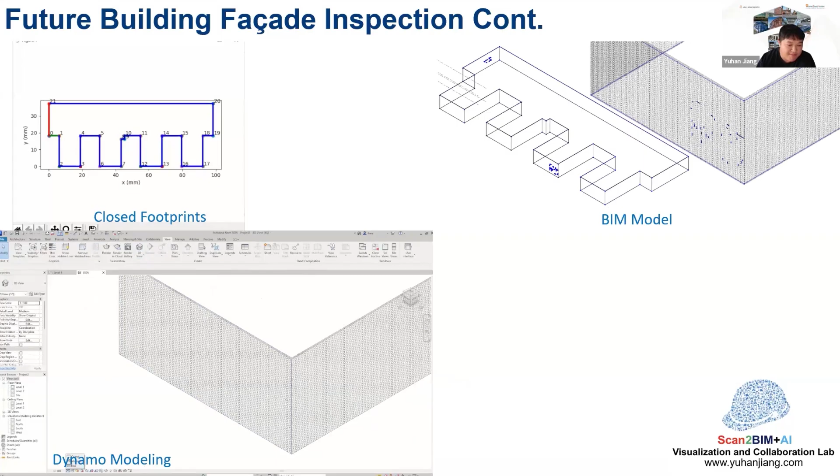Yes. So first we're going to identify all those corner points, and then we can use the algorithms to find out the floor plans. And in the bottom one, you see this is Dynamo modeling. The video is playing, and you can see the Revit model has been generated. Once we zoom in, we can see this is a brick wall. And also we can see those cracks have been identified by the AI and mapped into the Revit model. And we can check the parameters like the length and the thickness of all those cracks.

And Yuhan, on this Dynamo modeling and those cracks, can that be exported to some sort of a schedule where that can be quantified? Yeah, definitely. Since for each of them we already have its length and its thickness, we can do it two ways. When we model it, we have all that information in a table like a spreadsheet, right? And then we can share this with the inspectors for documentation, or even for the repair. Another way is we can export this from Revit as a schedule, like the window or door schedule shown in the previous slides.

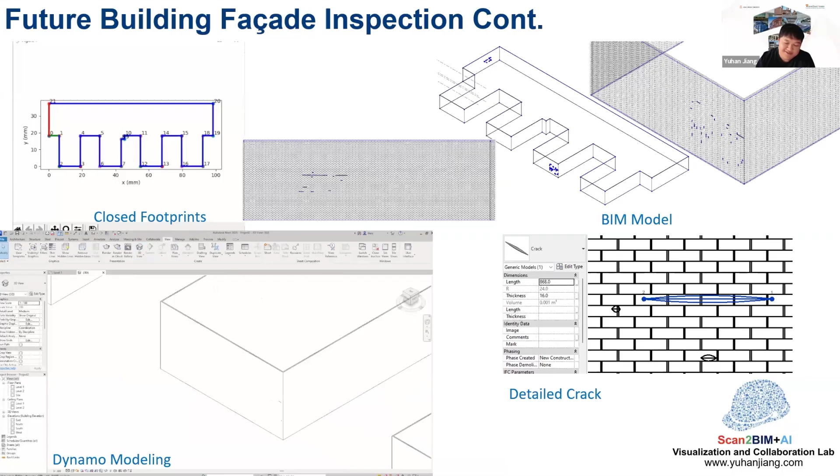And is that process like overnight? You set the program and it's pretty quick, or is it in seconds? Currently it takes just a couple of seconds to generate those models. Wow.

So I think that's it for today, but it was an amazing and insightful session. Peter, Ryan, Yuhan, all three of you. I'm a PhD in structural engineering too, Yuhan. I have done earthquake analysis of buildings where I developed plastic hinge models. So, Peter, with the insights I've got, maybe in the future we can also do some research with the students.